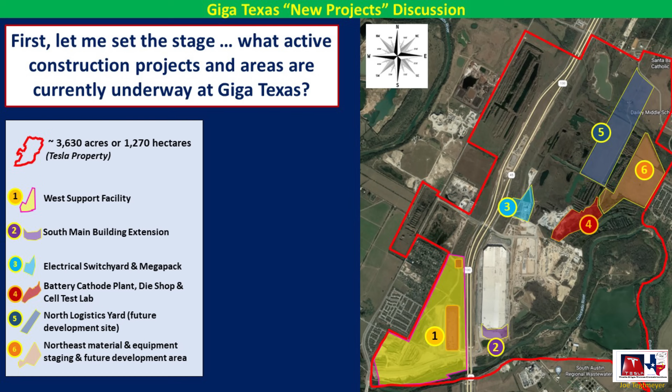Now, this does not include smaller projects such as the West Main entrance reconfiguration, receiving door expansion, some of the concrete apron work along the body in white and the General Assembly structure, and it's not going to talk about the assembly of the stamping machine structures in the Stamping 2 section on the south end of the main building. But we're going to talk about the certain areas of particular interest for this discussion on this major news story.

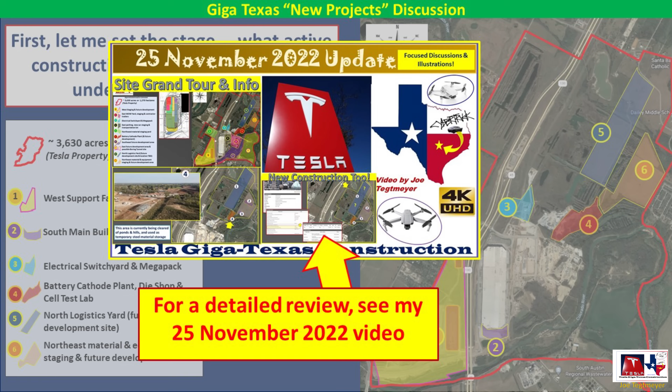For those of you that would like more detail than what I will go into in this particular video discussion, I would recommend you take a look at my 25 November 2022 video, where I go into depth and detail on all of these major construction areas.

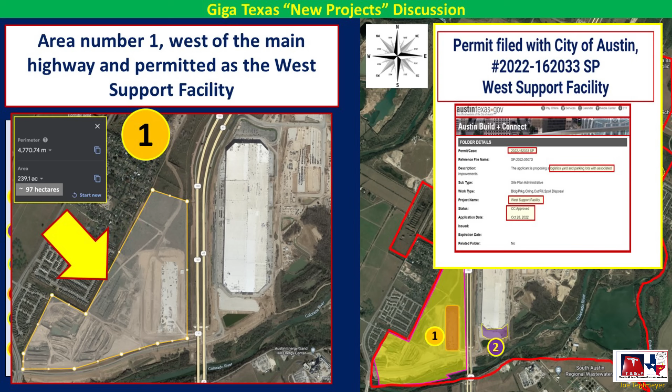The first major construction project in progress now is on the west side of the main highway that cuts through the middle, going north to south, of the Giga Texas property line. As you can see in the left-hand image, it's about 240 acres. We've been seeing a lot of clearing of ponds and hills and preparing a grade. It's also where they have the temporary expansion of the warehouse on wheels. You can see the permit for this construction project filed with the City of Austin in the upper right-hand corner.

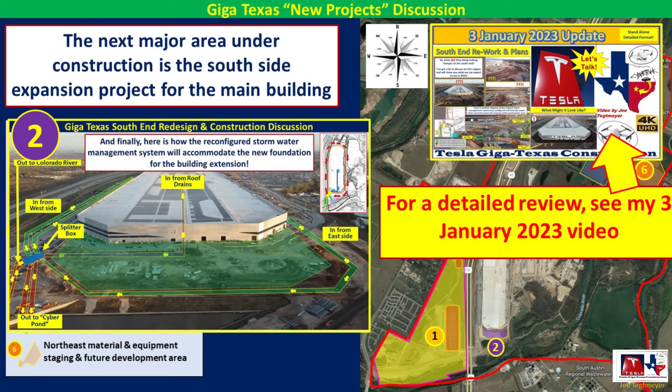The second major construction project currently underway at Giga Texas is the expansion of the main building on the south end. You can see on the left-hand side image how that foundation is being prepared. They're currently doing some reconfiguration with underground stormwater pipes and some utility systems. They've removed the concrete lot, been doing some test pier drilling, and are also preparing to start construction on this site in the relatively near future. I did cover this in extensive detail on my 3 January 2023 video, so I'd recommend looking at that particular video if you want more details.

Construction site number 3 is the new permanent electrical switchyard, being built just north of the temporary electrical switchyard. This is also where the Megapack battery electric storage system will be built nearby. This site has been under construction for several months.

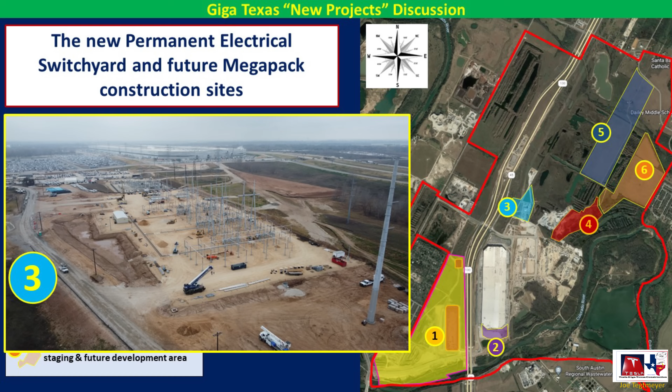It's rapidly approaching the point where they will begin to connect electrical high-tension wires to the electrical switchyard, and soon we'll see this site operational. Once it is completed, we should see the Megapack installation underway.

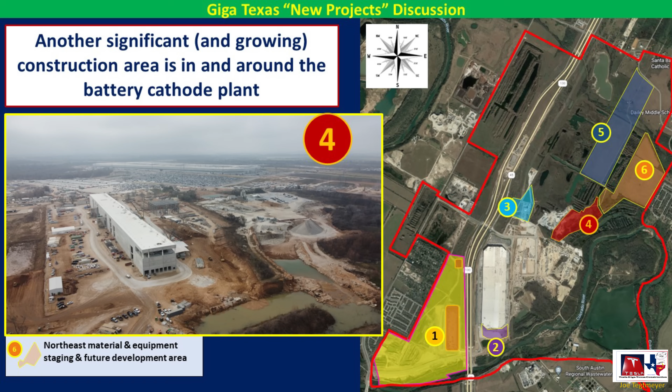The next area is number 4 for major construction here at Giga Texas. You can see where that's located on the map. This is the battery cathode plant. There are actually 3 new facilities under construction at this particular location, and that will be important for our later discussion. It's located just east of the old Martin Marietta concrete batch plant, about 1 mile or so from the main plant to the northeast.

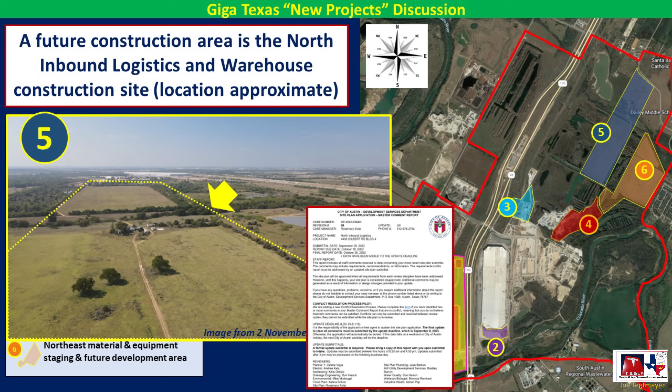Now, they've already completed soil test sampling in that south large open field, and we're also seeing quite a bit of materials starting to be stockpiled in that south end as well. So hopefully within the next, say, 3 to 6 months, we should see this particular construction site beginning.

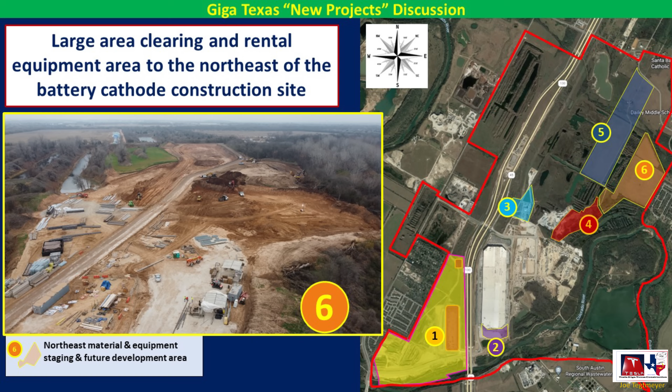And the final area I will discuss is area number 6. This is northeast of the battery cathode construction site. Although this isn't specifically a construction project, there is quite a bit of activity with removing dirt, improving the grade, filling in ponds, reducing some of the hills. So it is possible that this may at some point in the future be a future construction site. But right now I'm keeping my eye on it because it is so close to the battery cathode plant.

The next thing we need to discuss is some key terms and items that are needed to understand and put into context the documents that were cited in the recent news articles. Actually, over a year ago, on the 26th of November 2021, I covered some very similar subjects about these permits, the inspections, the TDLR accessibility barriers projects, and at that time, why was it so important?

The main reason is that Giga Texas was approaching the point where first production was about to begin. Now, in that video at that time, I talked a lot about who and what TDLR is, what their functions are in relation to the file documents that are very similar to the ones that we see today, and how this related to the initial production start at Giga Texas.

Specifically, Giga Texas had 5 main areas that they needed to get approval for to begin the initial production and to allow people to work in this area. Now, as you can see, the Texas Department of Licensing and Regulation, which is TDLR, is responsible for licensing and regulating a broad range of operations. Primarily it is to protect the health and safety of Texans who work in and around these particular facilities.

Now, it's important to make a distinction that TDLR is not part of the initial construction building permitting process. That is what the City of Austin does, and you file permits through them to begin and to complete your construction projects. But TDLR is part of the Texas Architectural Barriers Inspection Program, and these inspections are required once construction has been completed.

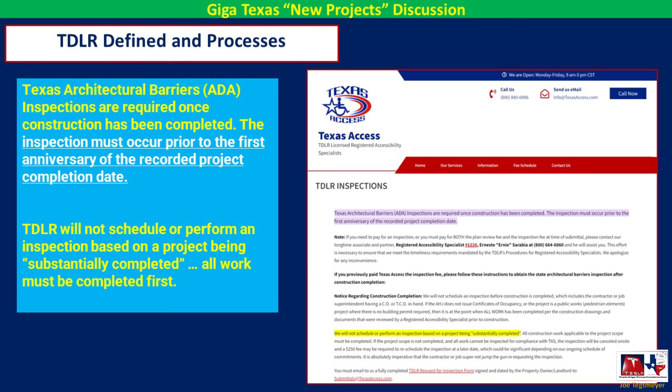Although you can file, as we are seeing now, some preliminary information to get the process started. Now, in order to do these inspections, you need to have a construction project that is over $50,000, and it considers the total habitable or workable area inside the facility. This is not just the building footprint area size, which is what you see in the building permit documents. So if there are multiple floors or different parts of the building that people work in, they will count that as the habitable area.

The inspections are conducted by a registered accessibility specialist, or RAS. Design professionals, or the people constructing the building, must submit plans and specifications to the RAS no later than the 20th day after plans have been issued for permit.

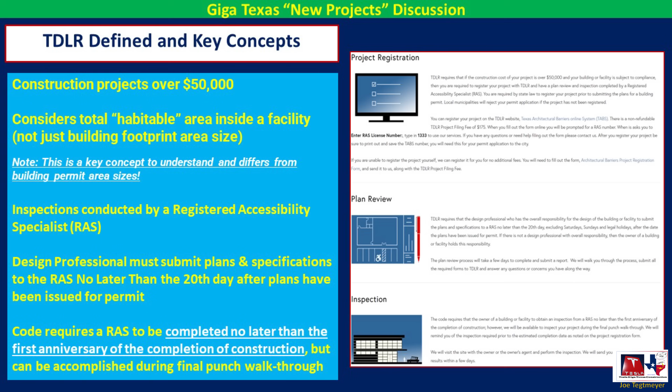The code requires the RAS to be completed no later than the first anniversary after completion of the building project. Going back to my 26 November 2021 video, the reason it was so important for those 5 major projects at that time—the general assembly, paint shop, body in white, stamping, and casting—was that these were the sections that minimally needed to be operational for production to begin.

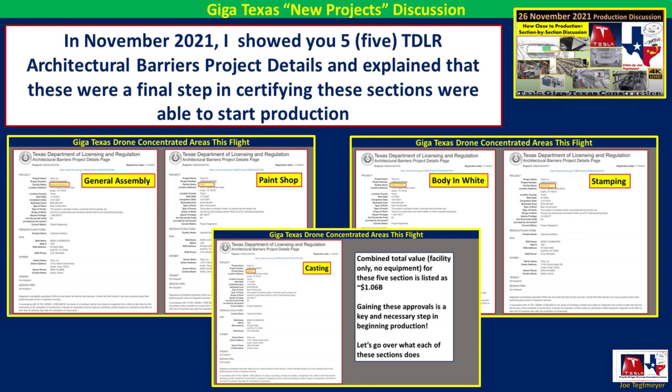It should also be noted that at that time, construction on these 5 main parts of the main factory had been underway for more than a year and were about ready for workers to begin working to start production. You can also see that they talked about a combined total of $1.06 billion.

So at this point you may be asking, what does this have to do with the major news now about the current 5 major projects and the $722 million being put into them? Frankly, it's everything—it's exactly the same situation we find ourselves in today, and why the news articles are not exactly accurate.

Let's take a look at the documents that mainstream media and other sites used for these news articles. Here they are—they said there were 5, but I've discovered 6 on the TDLR site: the die shop, cell test lab, cell 1, cathode, drive unit, and plastics. These have links to each document, shown here on screen and also available in the video description.

There's a couple of things I want to point out when comparing the document from November 2021 to what we're seeing now in January 2023. First, some people on social media have been confused by the terminology 'ground up and complete interior finish out of manufacturing facility,' thinking it means a new project. In fact it's just standard language, and it doesn't mean a new project is underway—it means a project is nearing completion or is in progress.

Also note that the use of the habitable workspace area definition to calculate square feet shows that the building on the left has multiple floors, while the building on the right has only a single floor—that will be important as we continue the discussion.

I want to use these 2 documents to drive home the differences between a construction permit, which you get from the City of Austin, and the architectural barriers, project details, and inspection document you get from TDLR. The document on the left is from the City of Austin—it's the original document for construction of the steel structure just west of the battery cathode plant under construction today, listed at 107,000 square feet. The document on the right is TDLR's for the same building, showing 107,400 square feet.

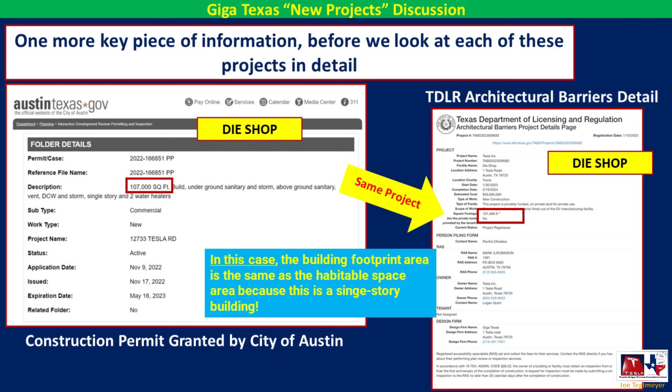It's essentially the same square footage because the building is listed as a single story. If the building had multiple floors, the TDLR document would show more square footage than the City of Austin document. Now that you have this information in context, let's look at each of these projects and see what's actually going on, knowing these are not new projects in the sense that they're already under construction or have neared completion.

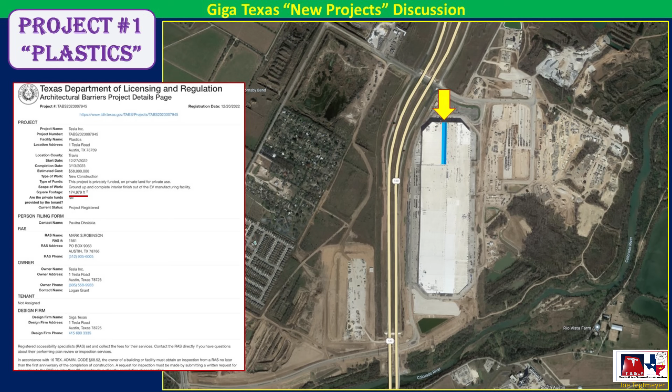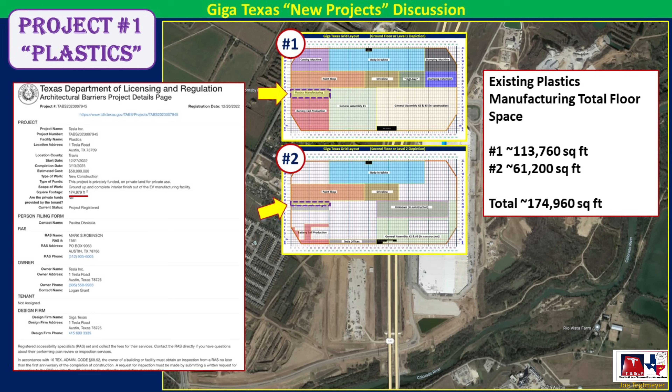It does have a second floor—a partial floor, about 61,200 square feet—bringing the total to approximately 174,960 square feet. Comparing that to the listed document from TDLR, they match. So this project is actually a great sign, meaning the plastics manufacturing portion of the building is ready to enter full production.

Project number 2 is listed as Cell 1, and it's about 693,000 square feet. As you can see by the map, it's the northwest corner of the main building, and this extends up to 3 floors. There is a 4th floor, but it is not part of the battery manufacturing process, at least not currently.

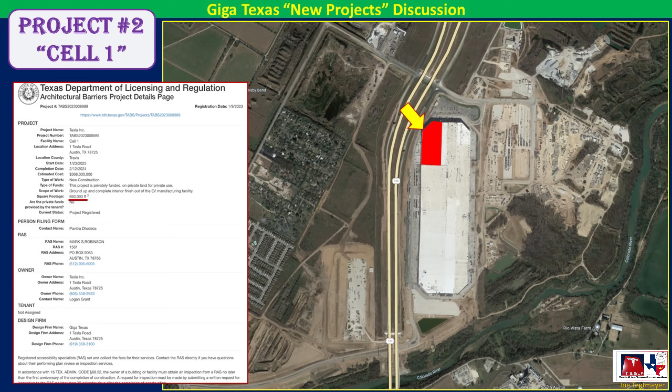Here you see the individual floor maps. Floor number 1, the ground floor, is about 419,900 square feet. Floor number 2 is a partial floor, about 55,000 square feet, give or take. Floor number 3 is a more completed but still partial floor with openings that extend down through the second floor to the ground floor. It's about 218,200 square feet.

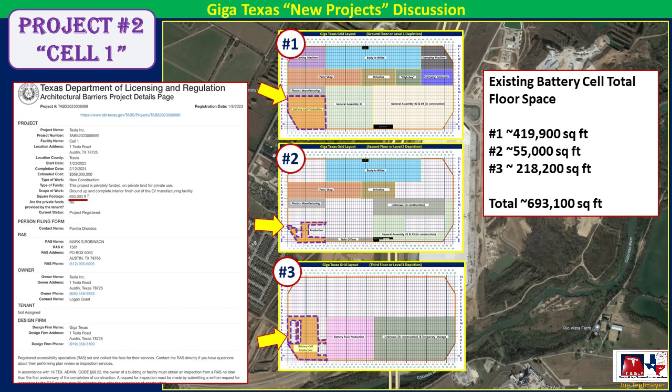This brings the total habitable or workable space to 693,100 square feet. As you can see, this is a structure that is completed, and the fact that TDLR is now getting involved is a great sign, because this means that the 4680 battery cell portion of the factory is ready to begin full production.

The next project is project number 3, or drive unit. As you can see in the TDLR document, it's about 423,000 square feet of workable or habitable space. In the image you can see where this is located. Now, it was originally 2 sections, drive line and high bay. It has since been renamed drive unit.

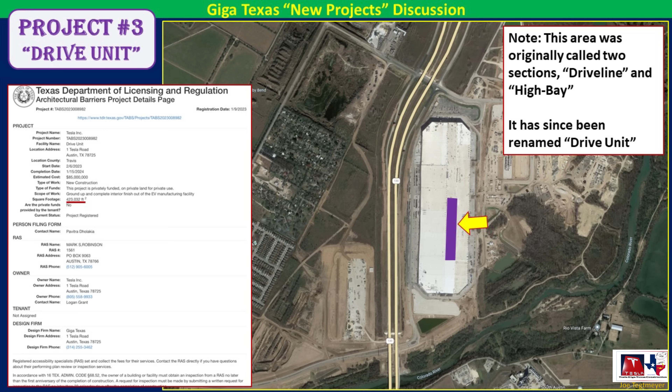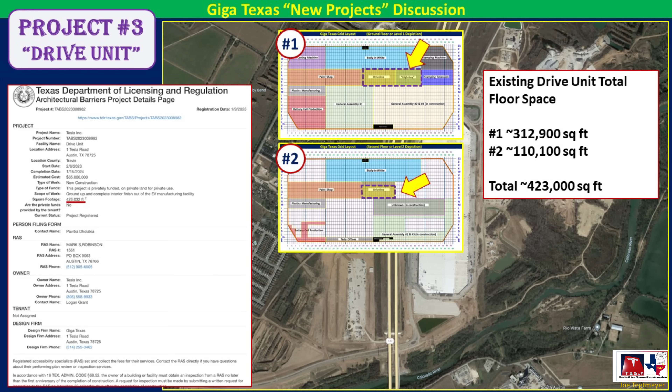You can see by the approximate floor diagrams here, number 1, the ground floor, is about 312,900 square feet. The second floor is a partial floor, about 110,100 square feet, for a total of about 423,000 square feet. This entire section is located just north of Stamping 2, which is the southernmost portion in blue on image number 1. This is where we see the AIDA stamping presses and other machinery being installed right now.

The next project we'll look at is number 4, which is cathode. On the left-hand side of the screen, you can see the TDLR document listing it as approximately 321,000 square feet of habitable or workable space.

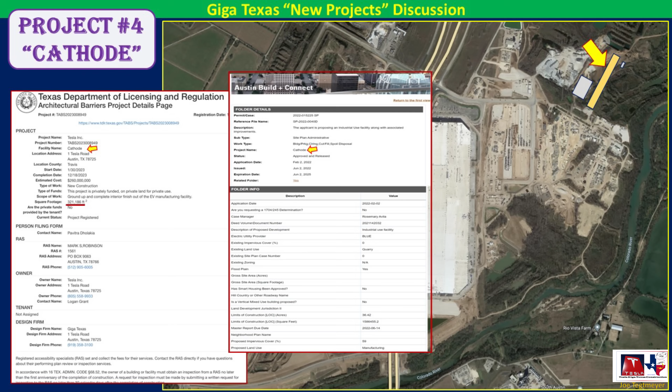You can also see here the City of Austin's original permit for construction, filed previously in 2022, with work beginning approximately June. Now, it is interesting that the building is not completed, but they have filed the TDLR. I believe this means Tesla is trying to get ahead of the game to accelerate the eventual production capability of this facility.

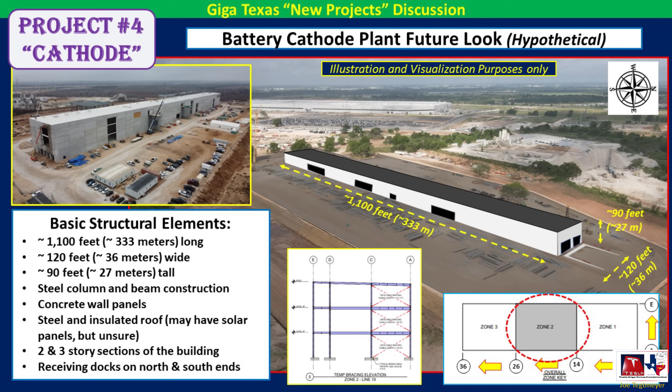The bottom right shows you how they divide up in a grid pattern and zone pattern for this building. There's 3 main zones, and then from east to west, A through E, and then from north to south, 1 through 36. Using that information, this is how the 3 floors appear inside approximately.

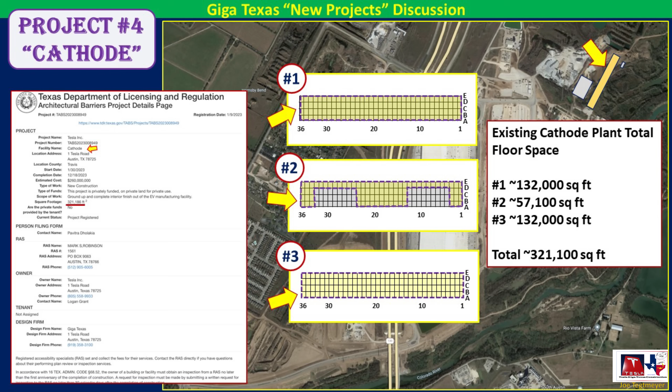Floor number 1, the ground floor, has about 132,000 square feet. Floor number 2 is a partial floor with 2 large openings that go from the ground floor all the way up to the 3rd floor, and in some cases partially up to the ceiling. It's about 57,100 square feet. Floor number 3 is almost contiguous, and it's about 132,000 square feet as well. These are approximate, but it gives you a pretty good idea, for a total of about 321,100 square feet.

Nearby is project number 5. It's listed as die shop in the TDLR document, and it's also listed as about 107,000 square feet. As you can see by this inset, this is the City of Austin original document for construction, also showing 107,000 square feet.

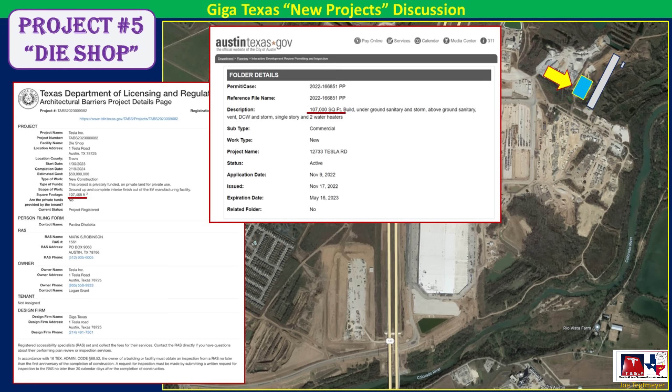Now the name die shop is somewhat of an interesting term. I don't know exactly if that is the idea that this is where dies are made or if it's related to some of the battery cathode process. So this is something I'm going to have to monitor as developments warrant.

So it's going to be a little bit shorter than the battery cathode plant, which is right next to it. It is also a steel column and beam construction, with a heavily reinforced section on the west bay where some extremely heavy equipment will most likely be installed.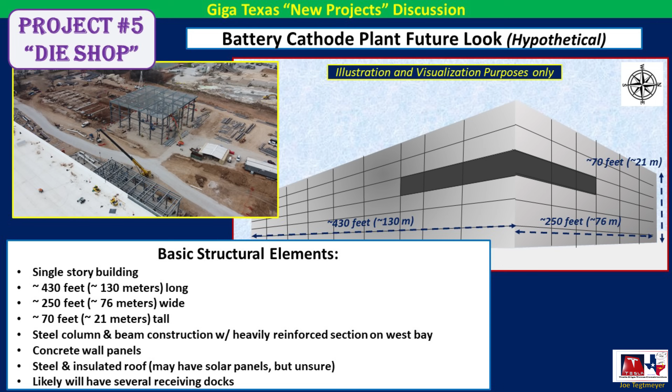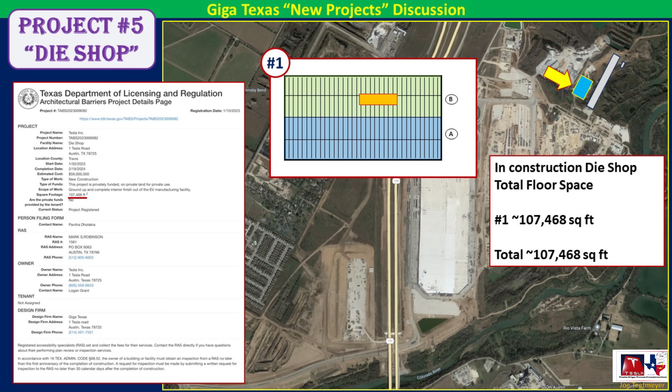The floor is about 107,468 square feet for a total of the same, and both the TDLR and the City of Austin permits will match in this case because it's only got one floor.

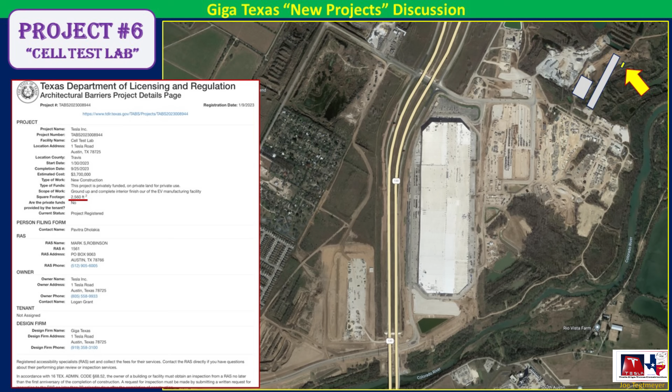And the final project we will look at is project number 6, which is listed as Cell Test Lab in the TDLR documents. This is very interesting because of its location and the fact that it's called a cell test lab. As it was being constructed, we did notice quite a bit of very interesting and reinforced sections inside of the building, which would suggest that it is a lab of some sort.

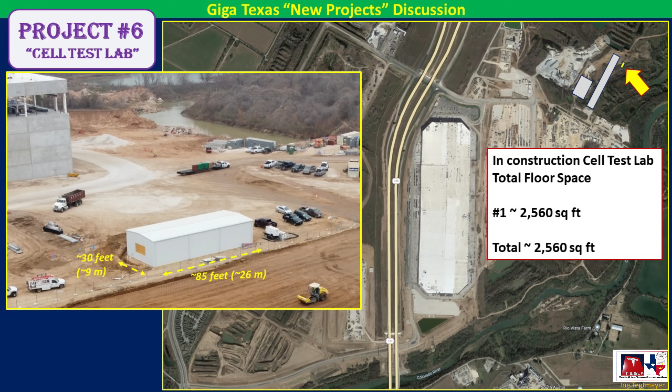So it's a very interesting building, and what its actual purpose is hard to tell right now, but Cell Test Lab suggests that they will be doing some specialized testing of some of the cell materials in this particular facility. So there you have it.

We've discussed the major news story about the 6 major projects and how they're going to look when they are completed, most likely. What does this mean for Giga Texas, and how the news story wasn't completely accurate in that this is not going to be completely new projects that we're going to see that we don't see on the site right now.

But at the same time, it's very exciting because this means that all of these projects are in a state that some of which are very close to, if not already, ready for full-scale production of their particular parts, particularly the plastics, the 4680 cell, and the drive unit.

And then the others, it looks like Tesla is trying to get ahead of the game and preparing for these inspections from TDLR at some point in the future, to try to expedite the process so that they can start production as quickly as possible.

So we talked about a lot of different subjects. We also talked about some exciting projects that weren't included in the major news story that I am excited about seeing. I hope that all of this was helpful and helped put into context what the news articles were attempting to say. Even though it wasn't this great new thing about all of these huge new projects on the horizon, it is very important for Giga Texas for these projects to be nearing completion, and also for what they provide to the production capability of Giga Texas.